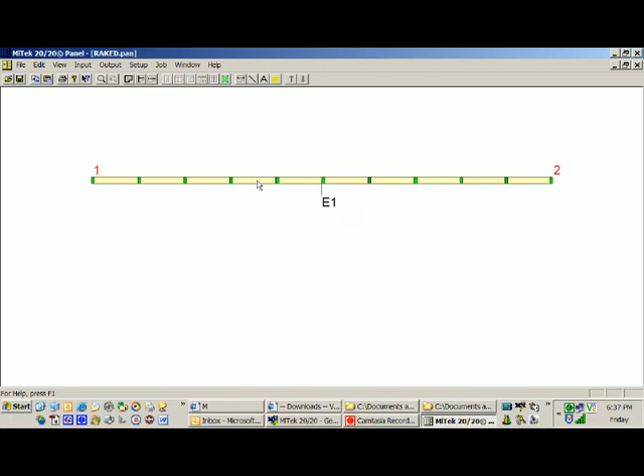Okay Arthur, we create a job first of all in Genesis, and then we go into panel. From panel, we create our wall, which is here at 6 meters long and 3.5 meters high. From this view we save as a DXF file, and that's all we need to do in panel.

We then move into PrimeCAD. The first thing we do is go to File and MiTek DXF. You then pick the path where your particular job has been saved and open it. Select Fit in Box, changing the drawing scale, then draw your box and that fits it into the box.

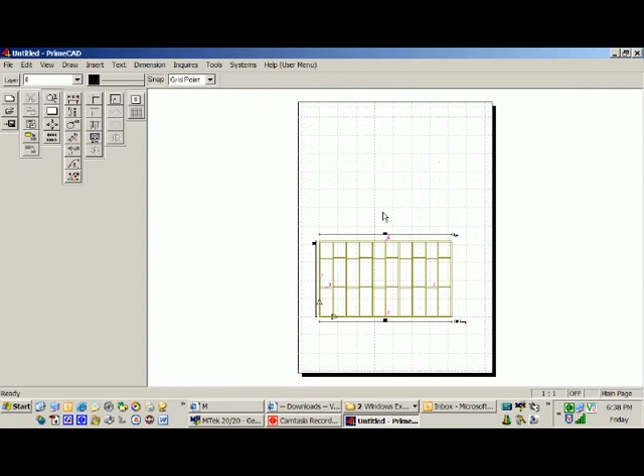You then draw a box around it, which makes it all green. You go to Edit, Explode, and select Polyline Lines, and that now makes the drawing editable. You then press F7 to maximize it on the screen.

The next thing we need to do is select our snap, and we'll snap it to the nearest point, so it picks the points that we need on individual items. You would then select your marker tool. We would select the bottom of the plate on the left hand side. X is 0 and we want to go up 900, and on this side our X is 0 and we want to go up 1200.

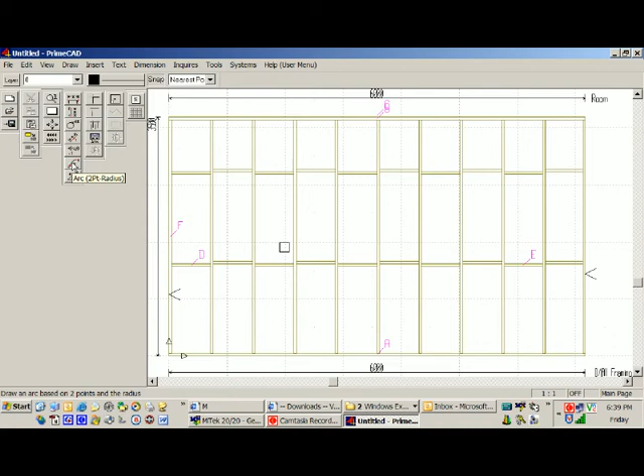Then we'd select our arc 2-point radius, select our point starting at the right hand side, draw across to the point on the left hand side, enter our radius. I'm going to enter one at 8 meters, so it puts a nice steep curve on it, and that shows us the curve we want to trim our studs off to.

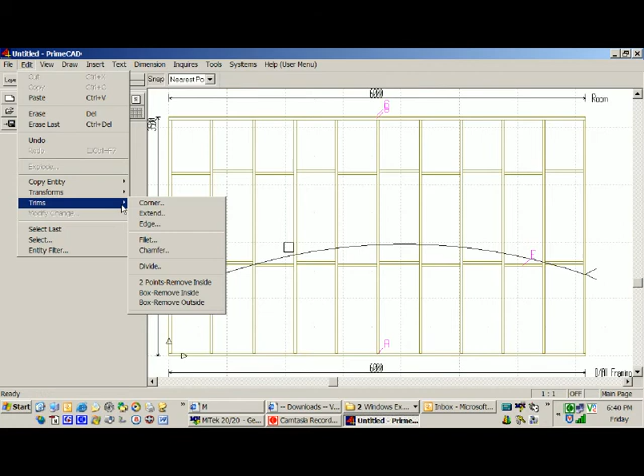You then go to Trims, Edit, Trims, Extend. Then select what we want to trim. We want to trim this line to the arc, this line to the arc, this line to the arc. So after you've trimmed all your studs to the arc line, you then have this curve.

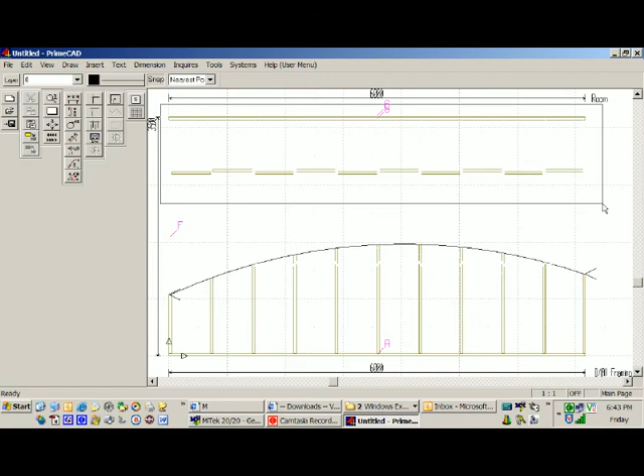Now what you can do is select the noggins and press delete. Same with the top plate and these noggins, and delete those as well.

We then need to put our dimensions in. So we select dimension line, select the line and drag across to put a dimension on it. That one's 900, which is the point that we selected. That one's 876, because that's going to the bottom of the plate, whereas this one's going to the bottom of the stud.

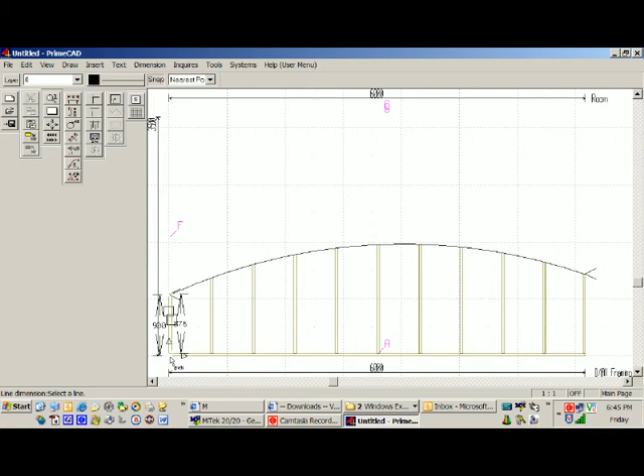Okay, and we just move along, selecting all the dimensions you would like to put in.

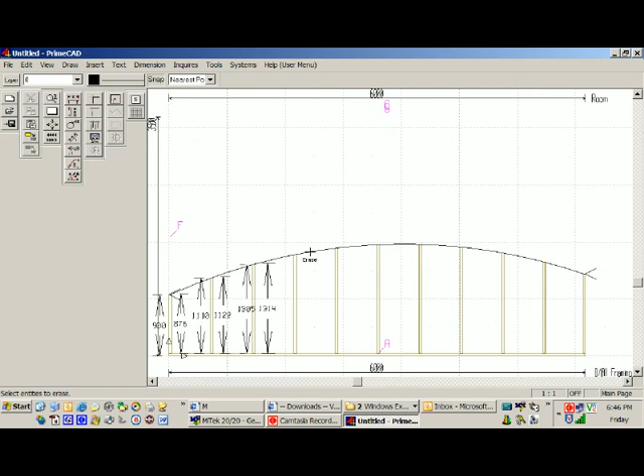Now the best way to ascertain what the angles are on the studs so they can be cut correctly is to actually delete your curved line to start with. So you go Edit, Erase, and select the line. That then gets rid of it. Press F5.

Okay Arthur, to get the angles that the studs need to be cut at, you actually need to put in some extra lines, as in one from each side of the stud, to actually create your triangle. Now what you can do is select View and then Zoom Window, and then draw a window around the top of the stud where you want to put the line in.

You then go draw line individual. Because it's snapping to the nearest point, you just select near the top of it and it puts a crosshair there to the other side, which then creates your triangle. Press F5 to refresh it, and you can see that it's correct.

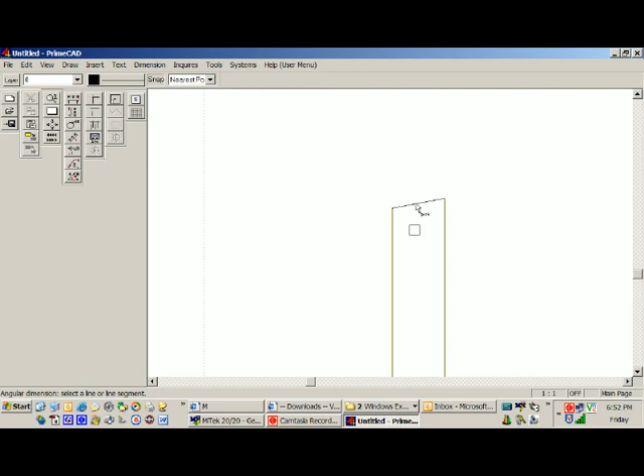Now the next thing to do is select your angle dimension, which you would then pick your line that you just created, and then you need to select F7 to zoom back out and select the bottom plate. This will then give you an angle between those two points, which in this case is 11.19 degrees.

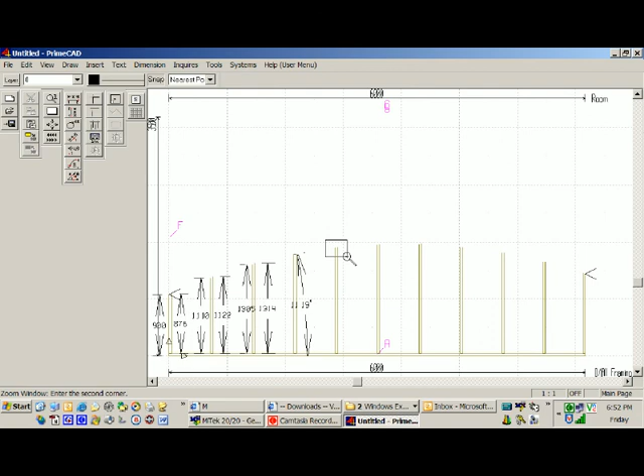Just as another example, we go View, Zoom Window, draw around the top of the stud, then draw line individual from that point there to that point there. Then you'd select your angle dimension tool, select the line, press F7 to zoom back out, pick the bottom plate, and it then draws the arc in, and when you click it shows you the angle needed. So that's 11.19 degrees, that's 6.84 degrees.

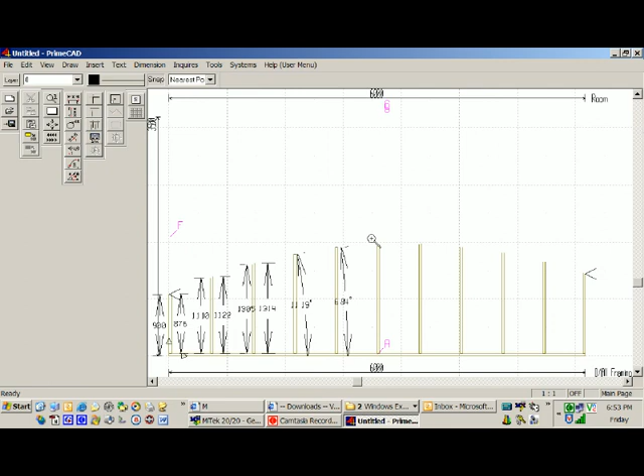Then for this one you do the same thing. You'd zoom window, view, zoom window. You can just press F10, draw around top of the stud, then go draw line individual, select from there to there. This will be even a lower angle.

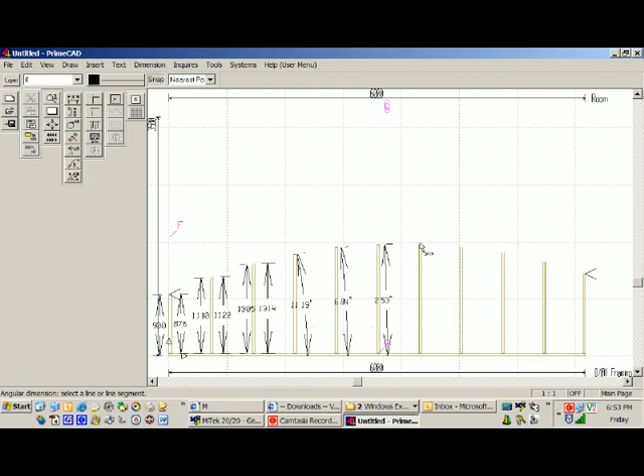Select your angle dimension, select the center of the angled line, then F7 and the bottom plate, which will then allow for your angle to be shown, and it's 2.53, and as you can see that's roughly what it would need to be. Well, that is exactly what it would need to be.